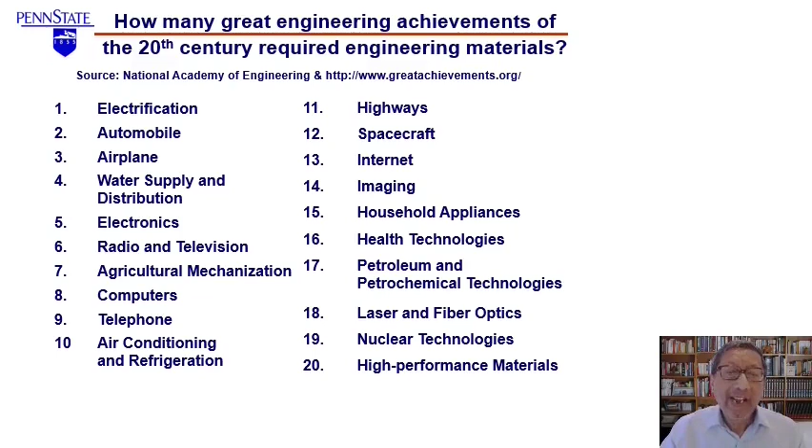Most of the important engineering materials consist of metallic materials and to a much lesser extent other materials. How do we know that? Review the annual production values of important engineering materials.

If you take just one variety of steel, and look at the dollar values of the raw carbon steel that we produce, it's $195 billion. Remember, this is before we make any component out of this hunk of steel. It's the material that is simply coming out from the steel plant. We haven't made anything out of it. When we make products, the dollar value goes up by at least a factor of 10 to 100. So instead of 195 billion, it will be 1,950 billion and above, right?

Okay. If you compare the dollar value of the production of carbon steel with worldwide ceramic sales, it's very difficult to even plot this number in the same scale. And we have a break in this scale. Remember, 20, 40, 60, and then it jumps to 175 because everything else is below $60 billion. Worldwide semiconductor sales, about 24 billion, little less than 24 billion. Aluminum, way below that of steel.

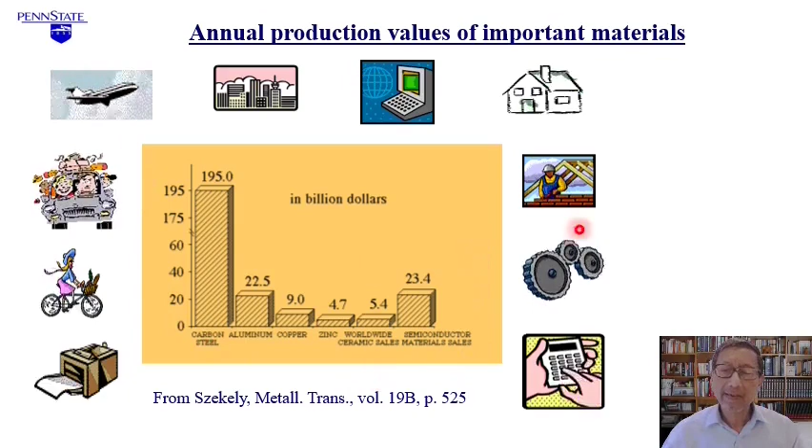So where are these used? In housing, in transportation, in agriculture, in machine tools and machinery, and all manufactured goods. All of them would need metallic materials. That's another very important thing to keep in mind.

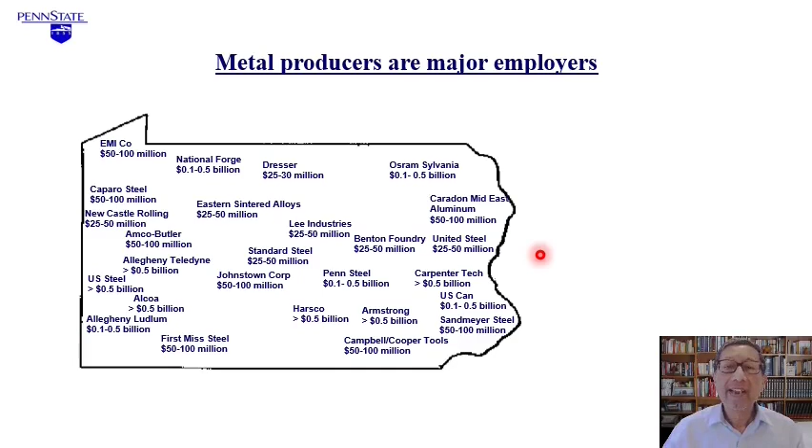Metals producers are major employers of our graduates, starting from steel companies near Pittsburgh. There are all kinds of companies. If you look at their SIC code, that simply means that if you are a registered company in the state of Pennsylvania, you declare your primary business interest. And the primary business interest of most companies that do business in Pennsylvania is metals. They deal with metallic materials, and they are the major employers of our graduates.

Processing is also changing. There are new processes in manufacturing. Even steel is processed in a more sustainable way today than we did 50 years ago. So there are many examples one can provide as to where we are advancing the processing technology.

Take, for example, the International Space Station. This is the commander of the International Space Station, and they needed a wrench because theirs failed. So they told NASA they needed a wrench, but there was no resupply mission planned in the near future. So instead of physically sending a wrench, NASA sent a computer program for 3D printing. They had a desktop printer inside the space station, so they could physically print this wrench right inside the space station. So you see, manufacturing is also changing—it's remotely made from Earth, and the product is coming out from a desktop 3D printer inside the space station.

General Electric has a plant in Alabama that makes components of jet engines. What they are printing, using 3D printing or additive manufacturing, is a fuel nozzle like this one. This nozzle used to be made using some 20 separate components. Now, thanks to new additive manufacturing, they can print this component all in one piece. We could not even think of that 50 years ago.

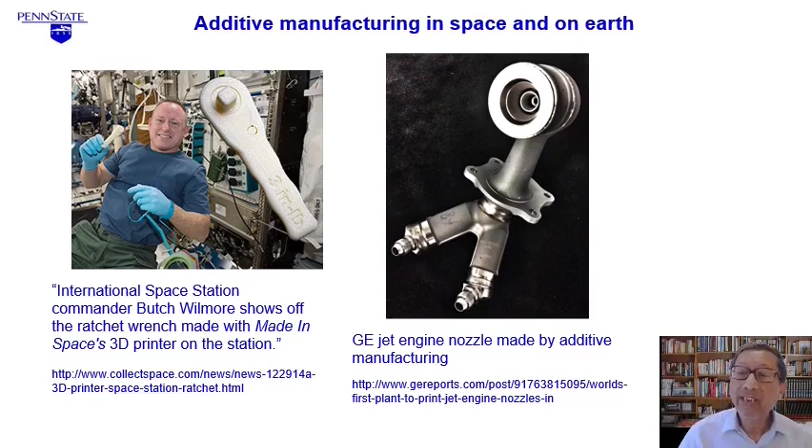And more important, the knowledge of materials is more critical today than at any time in our history. I'll give you one example.

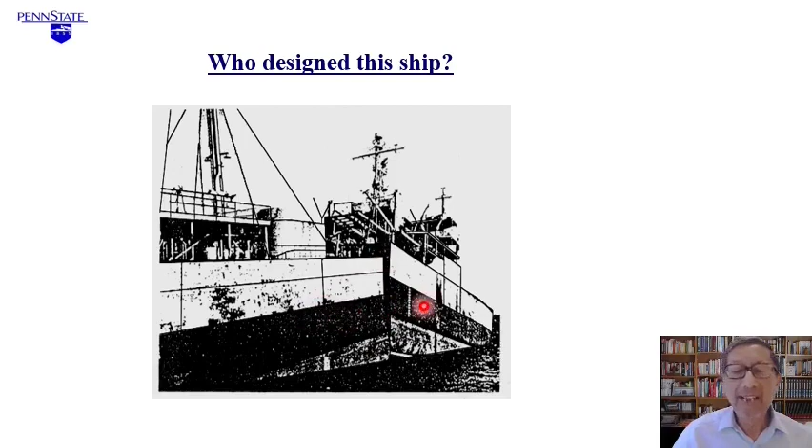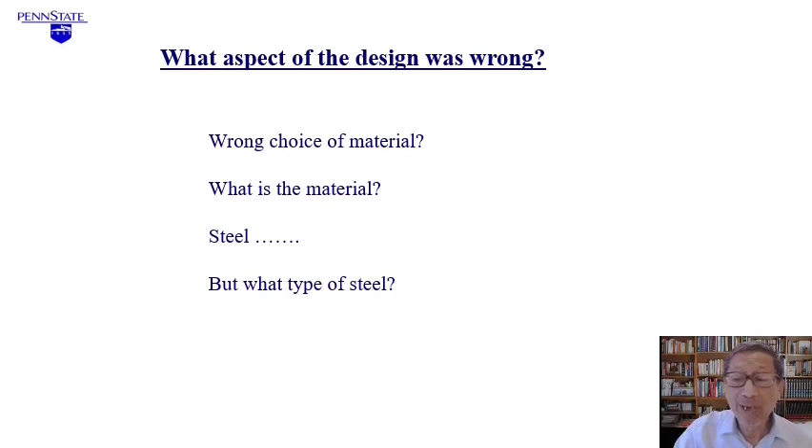Look at this ship. It was built around the Second World War, more than 60 years ago. We built about 3,000 of these. But many of the ships had the same fate as this particular one—breaking open into two pieces, and this isn't even a combat situation, just in port. Why is that? Of course, it's because of the wrong type of material. But what is the material? Well, it's steel, but what type of steel? We have to know how we actually design and designate a particular category of steel. That's what we need to know.

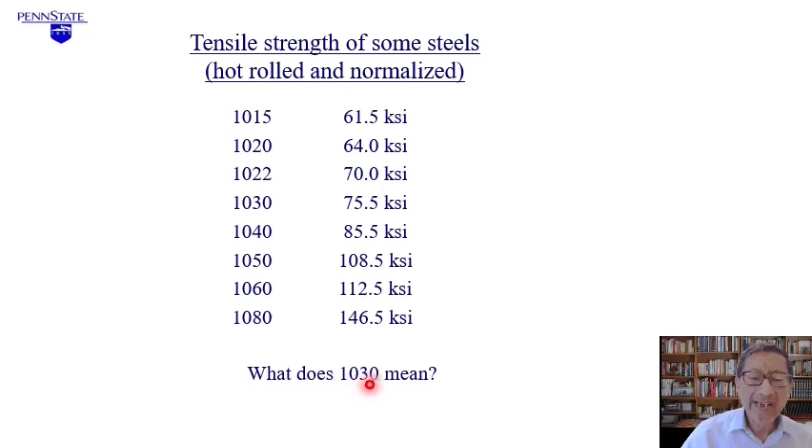So let's look at some of the standard designations of steels. These are some of the tensile strengths of rolled and slowly cooled, or normalized, steel. Look at the range of strength, from about 61 KSI to more than twice that, close to 150 KSI. What's the difference? We designate each variety of steel using four numbers. The first two digits designate the amount of alloying elements, and the last two give the concentration of carbon. These are all carbon steels. Let's take 1030 steel—the 10 is the extent of alloying, and the 30 is the concentration of carbon in the steel.

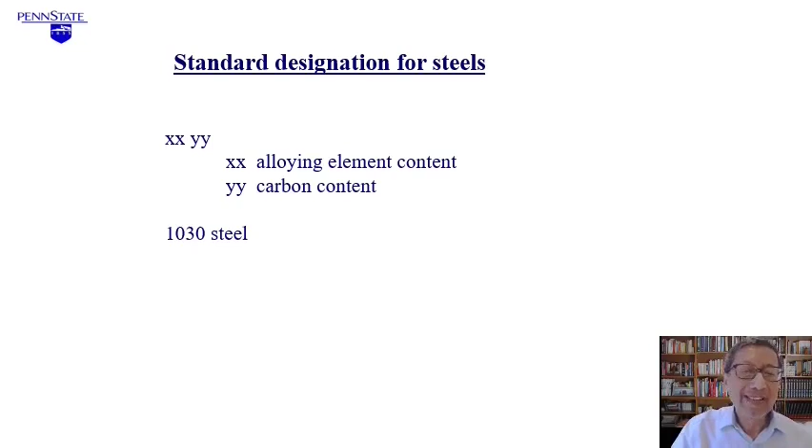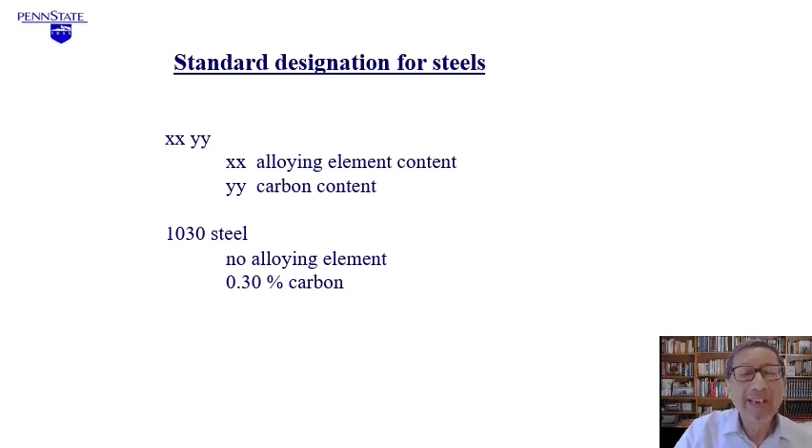So let's look at what that means: XXYY, where XX is the alloying element content and YY is the carbon content. So for 1030 steel, 10 means no alloying element, and 30 means 0.30% carbon. So 1030 means a plain carbon steel containing 0.3 weight percent carbon. Similarly, 1040 would be a plain carbon steel containing 0.4 weight percent carbon.

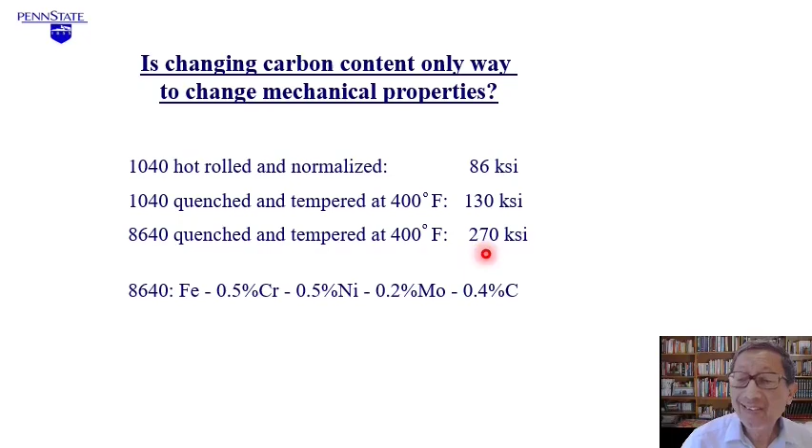So carbon content can change the strength of the steel, but so can what we call heat treatment. If we rapidly cool it, we call it quenching, and if we heat it, we call it tempering—both give you different strengths. Similarly, if you add alloying elements, like in 8640 steel, which has 0.5 chromium, 0.5 nickel, and 0.2 molybdenum, containing 0.4% carbon—so 40 means 0.4% carbon, and 86 means nickel-chromium-molybdenum steel of this concentration—that gives you strength double that of 1040. So the carbon content has a great deal to do with strength, and the alloy content also affects strength, and so does heating and cooling, which we call heat treatment.

So what are we saying? If we change the carbon content, we can expect a change in strength.

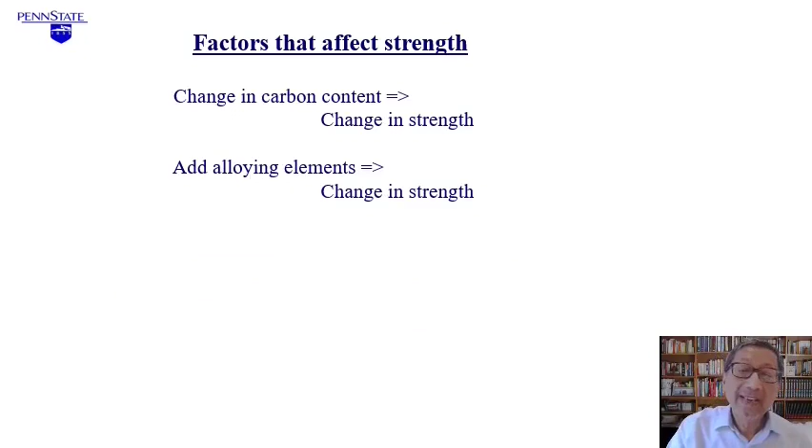If we add alloying elements like we did for 8640 steel, 86 means 0.5% nickel, 0.5% chromium, and 0.2% molybdenum. That also gives more strength. We can heat and cool it, and we will talk a lot about heat treatment, how to change strength and properties using heat treatment. It changes strength. So there are many ways metallurgists can change the strength of a material.

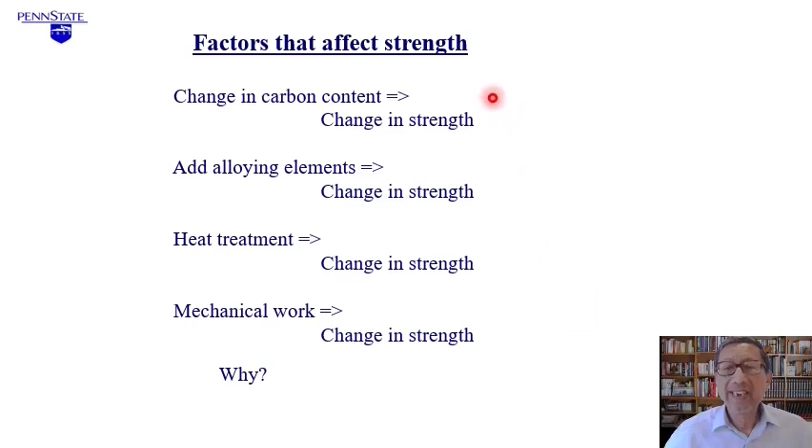Mechanical work is one of them. You hammer something, you make it harder, right? And you change the strength of that. So the question is why is this strength changing? Well, what has changed? Changing carbon content, changing alloy content, heat treating, or working on it mechanically, all of them will change what we call microstructure, in short, structure. So structure changes properties.

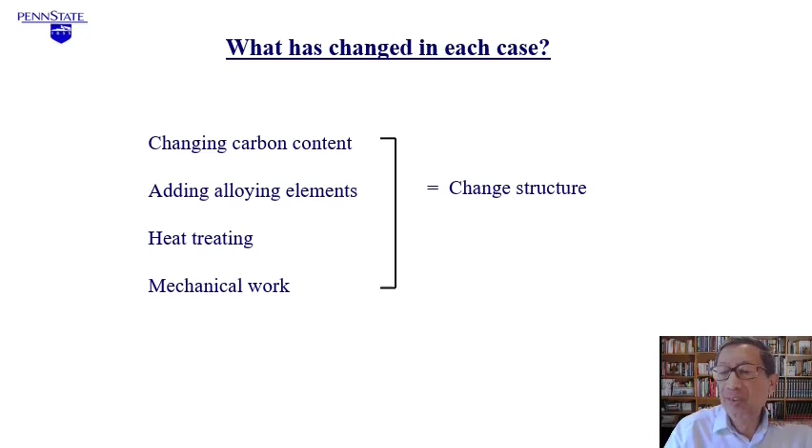If we change structure, we will change the properties. That's another important thing that we do in metals processing. Changing structure changes properties. Let's take one other example.

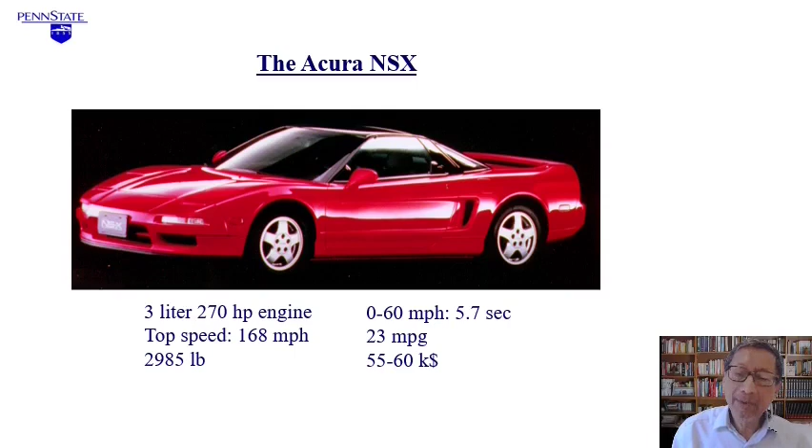A sports car, right? Acura. Acura NSX is an all-aluminum sports car. 3-liter engine, 270 horsepower, nothing to sneeze at. Top speed 170 miles per hour, and this is less than 3,000 pounds, a ton and a half. 0 to 60 in 5.7 seconds is not probably the best, but it's nothing to sneeze at. 23 miles per gallon, and it will set us back by about 55-60 K.

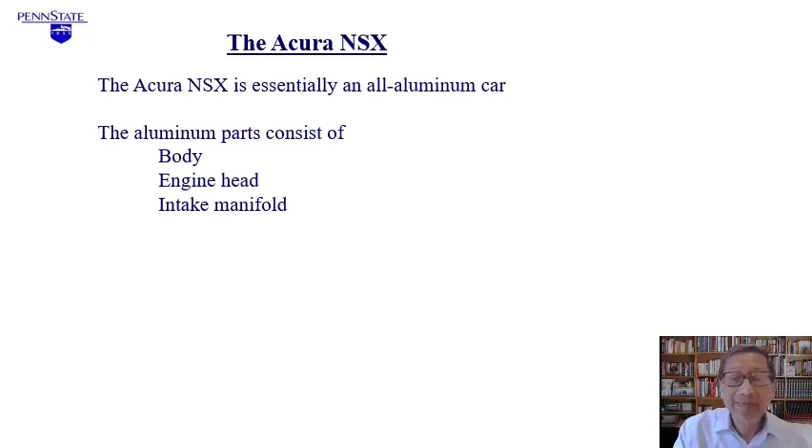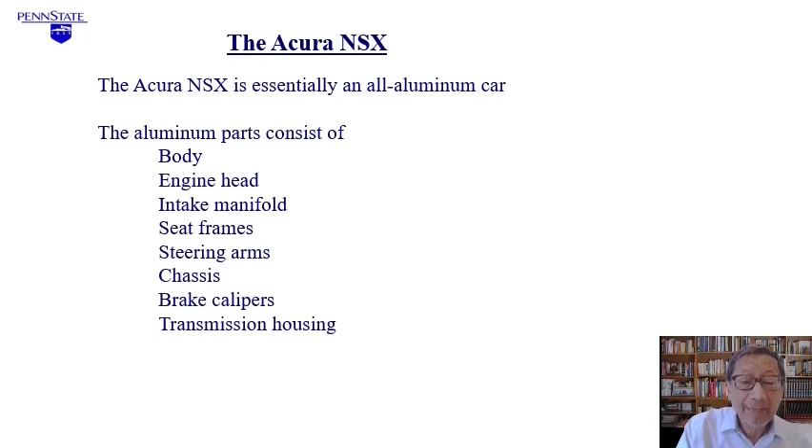So let's think of what it contains. All-aluminum car consists of a body, which is aluminum, engine head, which is aluminum, intake manifold, seat frames, steering arms, chassis, brake calipers, and transmission housing are all aluminum. But most surprising of all, suspension arms, on which the whole car sits, are made of aluminum alloy. Normally, aluminum we consider to be a soft metal, right?

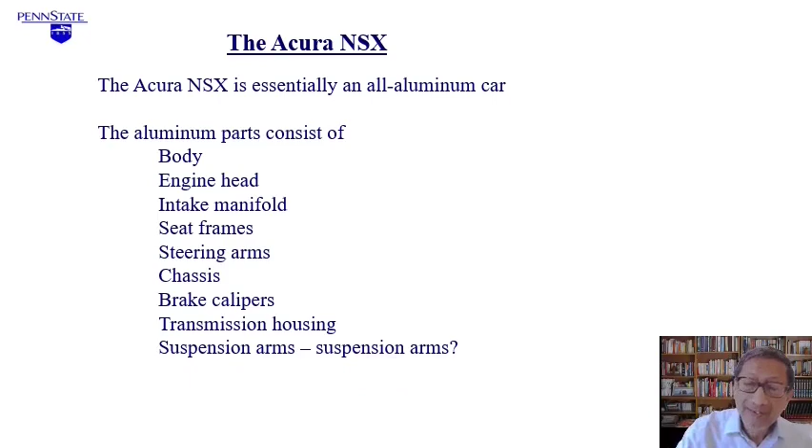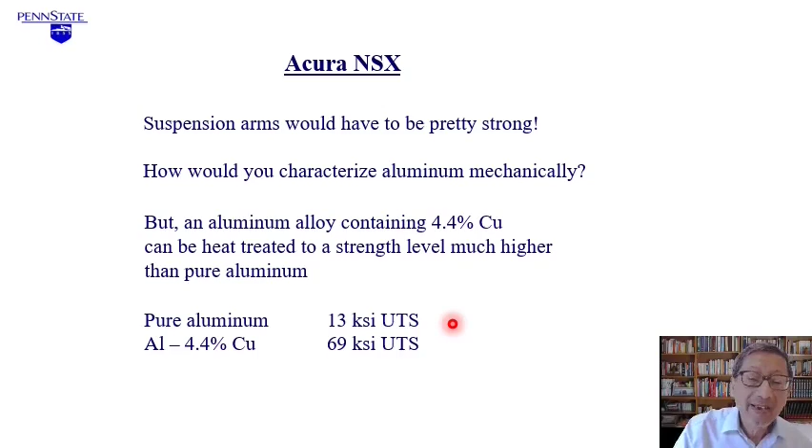So can the suspension arms be built with aluminum alloys? Well, you will be surprised. Suspension arms have to be pretty strong, and aluminum we would call very soft. But if you add about 4.4% copper to aluminum and heat treat it, its strength can be dramatically increased. How much? 13 ksi for pure aluminum, and aluminum with 4.4% copper can give you 5 times that much, 69 ksi, unbelievable, right? All of this huge change is because we added 4.4% copper. So look at the fantastic improvement in properties by adding a small amount of alloying element.

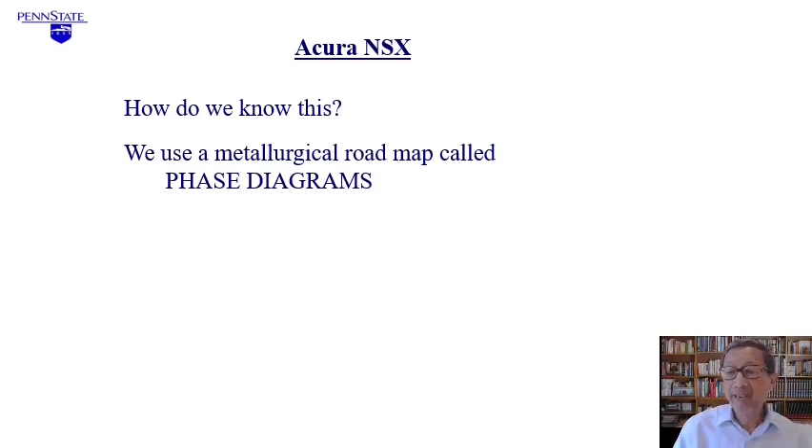So in Acura NSX, how do we know that this would be so strong? We use a metallurgical roadmap called phase diagrams, in which we plot temperature versus composition, and it can give a wealth of information for the engineers. It can also tell us how heat treatment can affect structure and therefore properties.

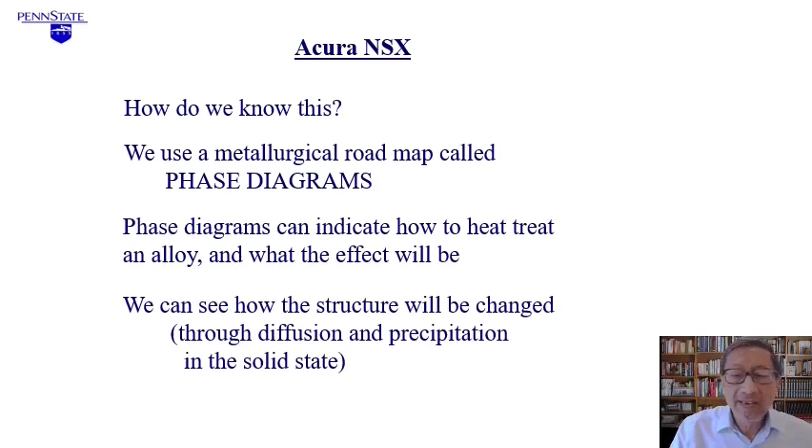So before we finish, I want to give you a grand challenge. This is indeed a grand challenge to all engineers of our time. This is something that has not been built, but we are thinking about it. It's called a space elevator. Have you heard of it?

So what you can do, you can run an elevator on this cable, hop into the elevator, hit the button for the 11,457,600th floor, and hop out. And when you do, you will be right into space. No other machinery necessary. You don't need a rocket. You simply get into an elevator, press a button, and you will be in space. That is what we are trying to construct.

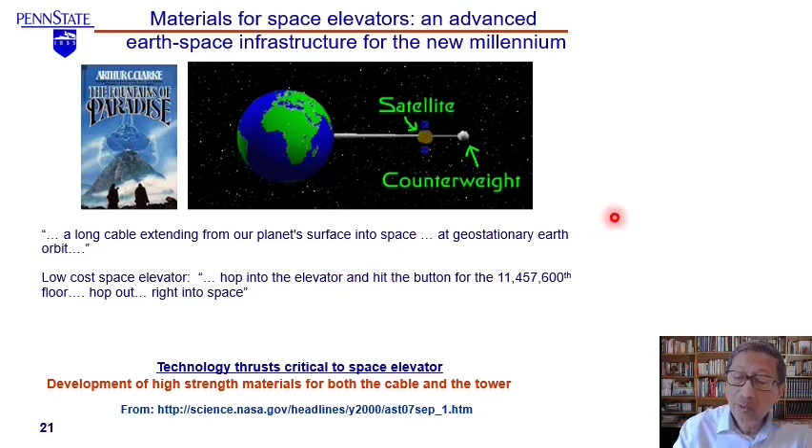And in fact, NASA Marshall has already got the plans. It's not feasible today, but it will be towards the end of this century. Who will build it? You will build it. All of you will help. And the concept was there in a science fiction book written by Arthur Clarke, a British-born science fiction writer who lived in Ceylon, a small island south of India, for all his adult life.

He wrote a book called The Fountains of Paradise, and in it he actually described this particular space elevator project. But NASA has since adopted it with all seriousness. There is a person who is manager of the space elevator project, paid from everybody's tax money. It is NASA's job to construct it before the end of this century, so we'll get rid of all our rocket engines and big fuel tanks and other gadgets, and instead we'll have a space elevator.

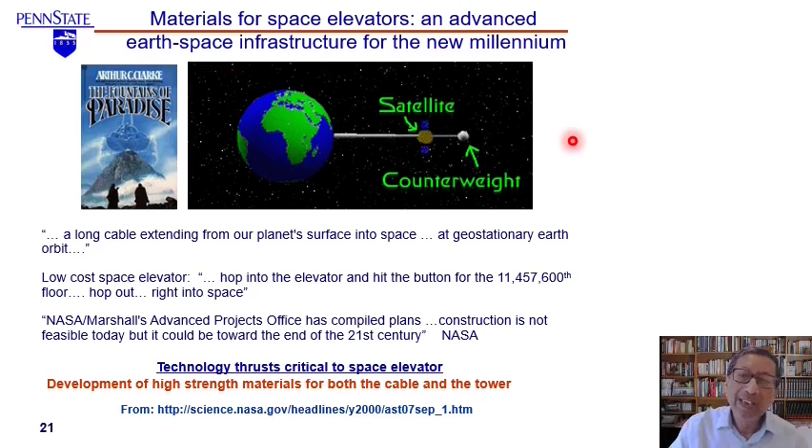So what's the critical part? Why are we not building it today? Why do we need to wait until the end of the century? We need materials that can actually bear the weight of a very long cable. What type of material can we make it of? What would be a suitable material for a space elevator?

But if you now go from nanometer to micrometer, increasing the size of this nanotube up to about 1.8 micrometer - micro being 10 to the power minus 6, so 1.8 times 10 to the power minus 6 meter as opposed to 460 times 10 to the power minus 9 meter - the strength drops precipitously from 150 gigapascal to only about 24 gigapascal.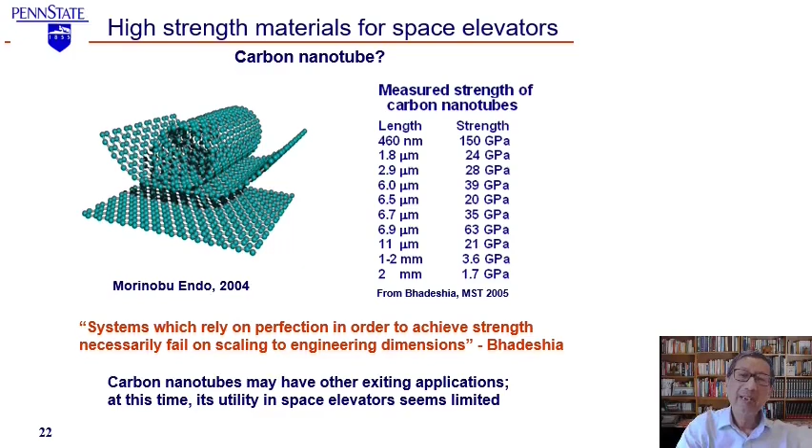For example, if we make a carbon nanotube that is 2 millimeters in length, the property will drop from about 150 gigapascal to about 1.7 gigapascal. So you can see that if we try to make a cable for the space elevator, the properties would not be anything close to the property of a very tiny, small carbon nanotube, because any system that relies on perfection is bound to fail. That's one of the laws of engineering science. So carbon nanotubes may have many exciting applications, but I don't think we are going to use it for the space elevator project. So what can we use?

Take steel - carbon, manganese, silicon steel of this composition: 1.5 silicon, 2 manganese, 1 carbon. If you heat it to 950 degrees, hold it there to make a particular phase we call austenite, and then put it in a pizza oven - yes, you heard it right, a pizza oven that can give us about 200 degrees Celsius for 10 days, so cook it like we cook pizza, but for 10 days - the structure you get is like this. It's a nanocrystalline structure with excellent properties and, more important, excellent toughness. So it's not just the strength, it's also the ductility - it doesn't break if you hit it with a hammer.

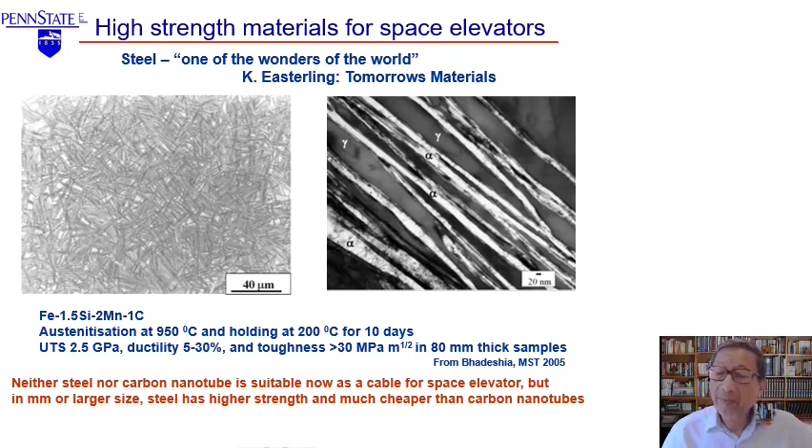So in summary, what did we do in today's class? We talked about the course logistics, and we reviewed how important engineering materials are for our standard of living, for agriculture, distribution of clean water, for housing, for transportation - you name it, we need these engineering materials, particularly structural materials. Many of them are metallic materials, and for those materials, the properties depend on structure. Sometimes large engineering structures fail, and they can often be traced to wrong structures or wrong materials used for the construction.